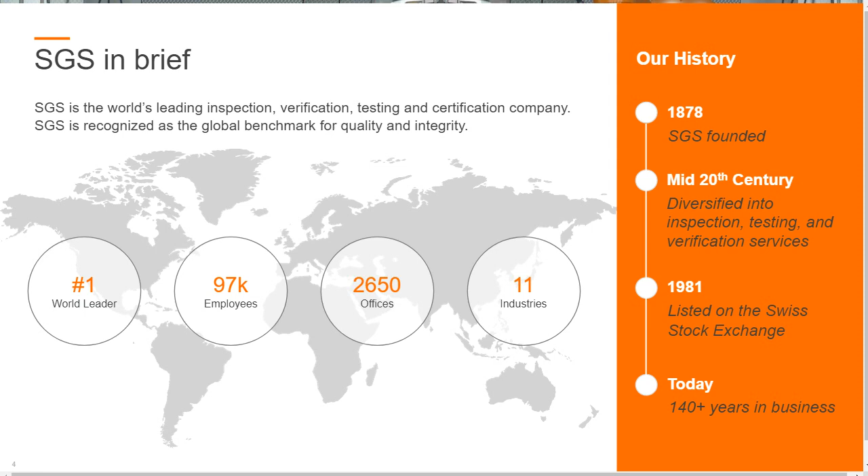Some of the services that we offer with our consultative services division, what we like to call knowledge solutions, range from everything from certification to training, customized audits, our supply chain risk management system, Transparency One, as well as just overall technical consulting.

And if you aren't already convinced as to why you should choose SGS, here on your screen are some of the differentiators that make us stand out when looking at us in comparison to our competition. We definitely have the industry experience, been around, as I mentioned, for over 100 years. We have the largest global footprint in terms of resources, and quality of service is something that we highly value. So we ensure that every interaction is met with the highest quality, and we like to work with you as a partner to ensure that you get to where you need to be.

And with that, I'll hand it off to Dusan to take us through our agenda. Good morning, good afternoon, everybody. Let's go quickly through the agenda of today's call.

We're going to talk about industry technological trends, some common automotive expectations, review of automotive customer requirements from some major OEMs and Tier 1s. We're going to cover automotive sustainability guiding principles. We're going to talk about automotive management systems, automotive integrated management systems, the way we see it. We call it a holistic automotive approach.

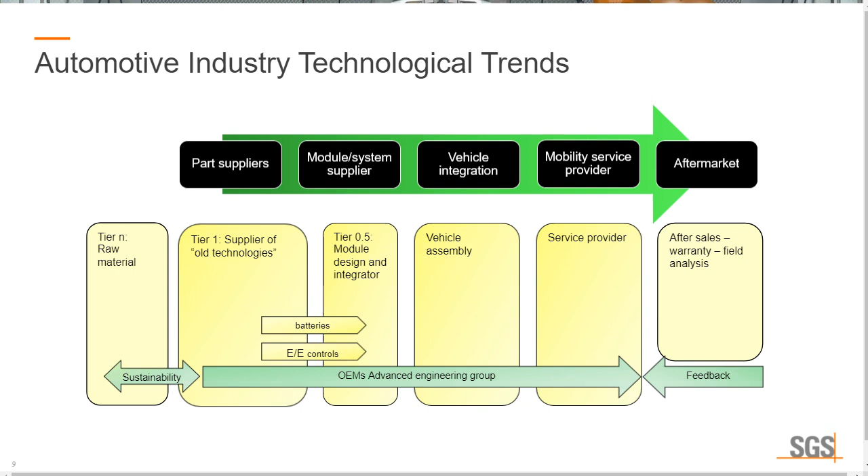With the OEM sourcing managers armed with the knowledge of evolving technologies, the challenge for the OEM and suppliers is how to stay ahead of the curve. As the supply chain can influence a business's success, the risks associated with choosing the right supplier become a key business decision. I'm sure we're all aware of that.

We know that over the past 4 or 5 years, safety has become the big thing with ISO 26262, functional safety for automotive vehicles. And we have some other standards here as well. A lot of technology is actually developing in this area.

So naturally, because it's electronic, it's a computer, it's an open network, security is a thing that's coming together, and you can't really detach safety and security. They're all tied together. With the exception of Tesla, most automotive companies have a fragmented supply chain model.

So making sure to check all sustainability boxes that I list here is very important to be able to be perceived as a trusted partner.

So competencies, compliance to industry standards, change management, staying ahead of the curve, as we call it, resources, the competence, of course, customer service, quality issues.

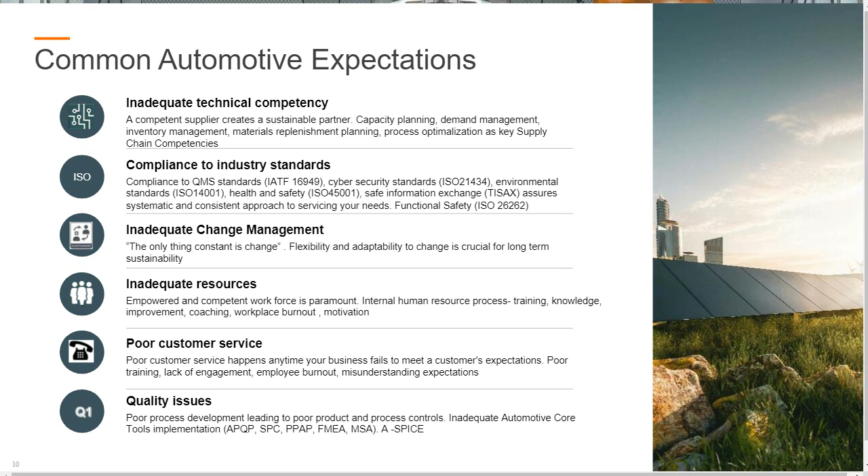Furthermore, environmental pollution. The OEMs have become very strict in choosing the right supplier that basically makes sure that they don't add to global warming. Shortages of raw material, natural resources, workforce health and safety incidents, absolutely.

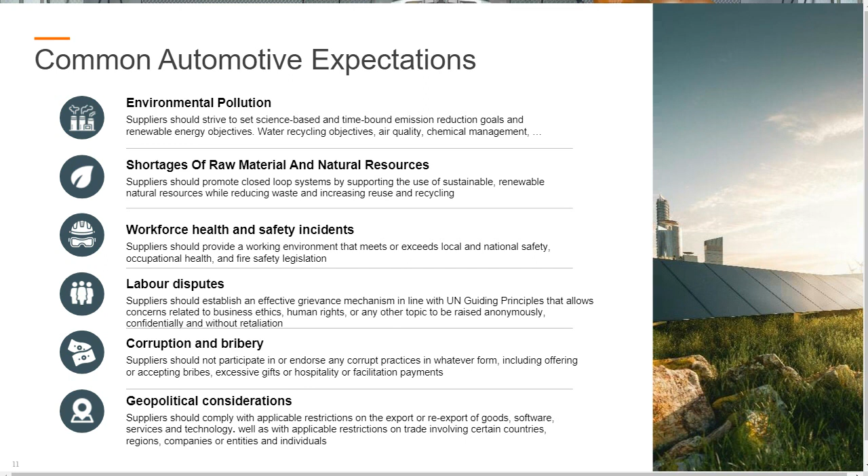Workers' satisfaction is very important. Their awareness and empowerment, as we call it. Labor disputes, mechanisms about that, corruptions and bribery have to be addressed definitely, and of course geopolitical considerations. Those are all basically sustainability boxes that each supplier has to take into consideration when approaching an OEM for a new bid.

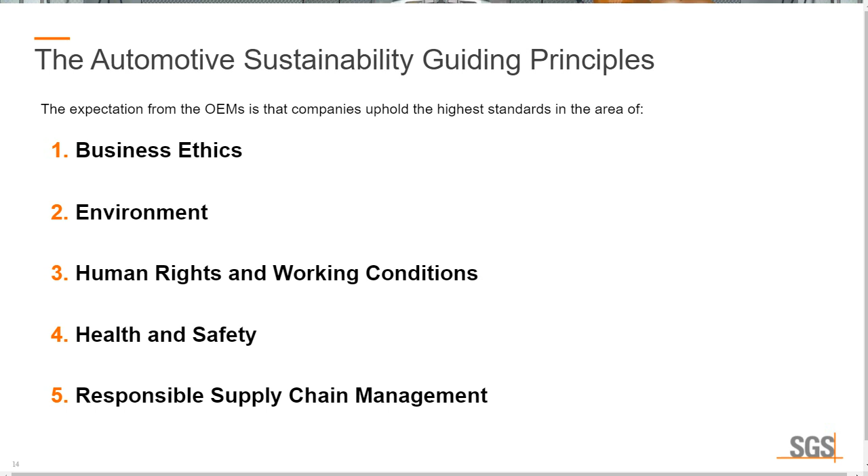So when we talk about automotive sustainability guiding principles, needless to say that a certain quality management system and certain management systems as a whole address several aspects of the sustainability aspect. So, for example, quality: ISO 9001 or IATF 16949 are quality management systems, basically handling the product quality or service quality, for that matter, when dealing with ISO 9001.

Software process, ASPICE, stands for Automotive Software Process Improvement and Capability Determination. It is used in the automotive market for, as we call it, embedded software that we see nowadays in every vehicle. Safety requirements: ISO 26262, road vehicles functional safety, is an international standard for functional safety of electric and electronic systems in automobiles.

21448, safety of intended functionality, is a next step to 26262. Of course, cybersecurity nowadays is very important. There's a standard covering the requirements for suppliers: ISO SAE 21434, road vehicle cybersecurity engineering.

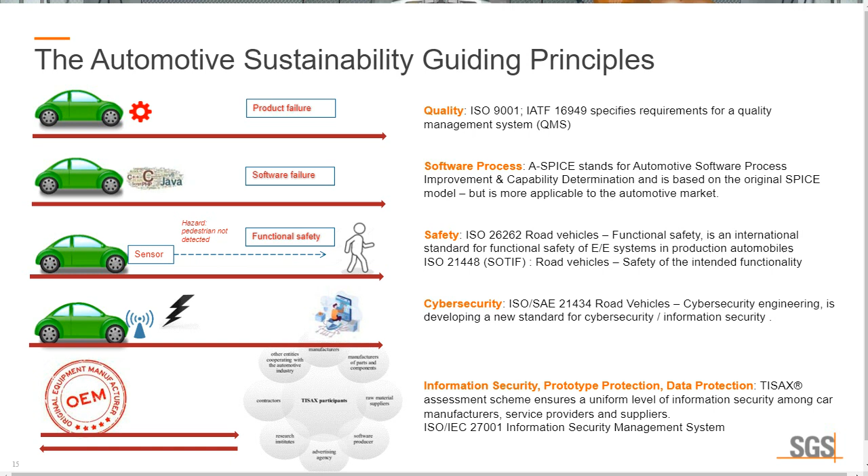TISAX, basically trusted information exchange, doesn't cover only OEMs, but basically everything that surrounds OEMs—any prototype data, any data that is exchanged between OEM and surrounding companies dealing with the OEM. Finally, ISO 27001 is an information security management system. It's very similar to TISAX, but it's not the same.

So in the previous slides, we covered ESG, automotive sustainability, environmental, social, and governance principles. We understood that OEMs' sustainability focus is business ethics, environment, human rights and working conditions, health and safety, and responsible supply chain. So I don't think it should be a surprise to everybody to see here listed several standards that automotive suppliers should

engage with, or should be looking to be compliant with, to make sure that they make a strong case when approaching the OEM for new business. So just several here: 14001 environmental, 45001 occupational health and safety, 50001 energy management systems, then greenhouse gases, social responsibility, asset management, anti-bribery management, just to list a few.

So when we list in a table, like I did here, all these standards that we talked about, we can distinguish them by two aspects. So-called ISO basically defines Type A management system standards that contain requirements against which an organization can claim conformance, whereas Type B management system standards do not.

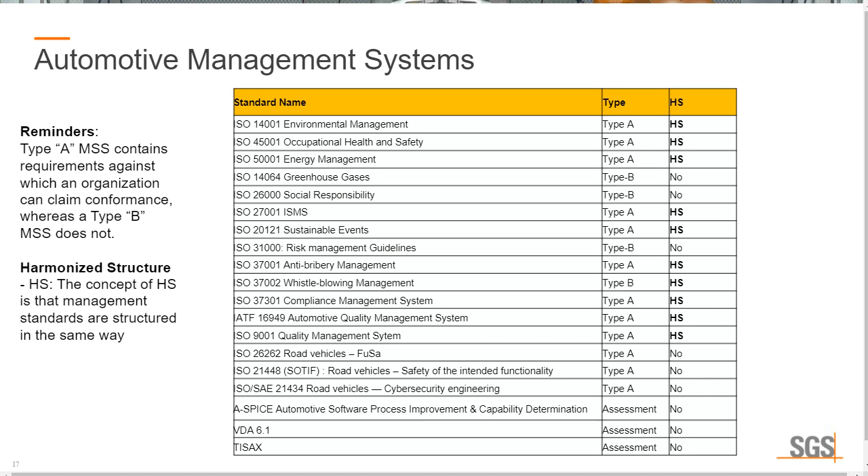Now that we understand that several ISO standards follow the same high-level structure, and knowing that OEMs very often require their suppliers to be compliant and certified to these standards, it is beneficial for suppliers to use an integrated management system approach instead of, as we call it here, piecemeal, building one by one.

So by building an integrated management system approach, they can benefit across the organization, basically save time, increase efficiency. The processes that they build can, at the same time, fulfill several requirements across each of these standards.

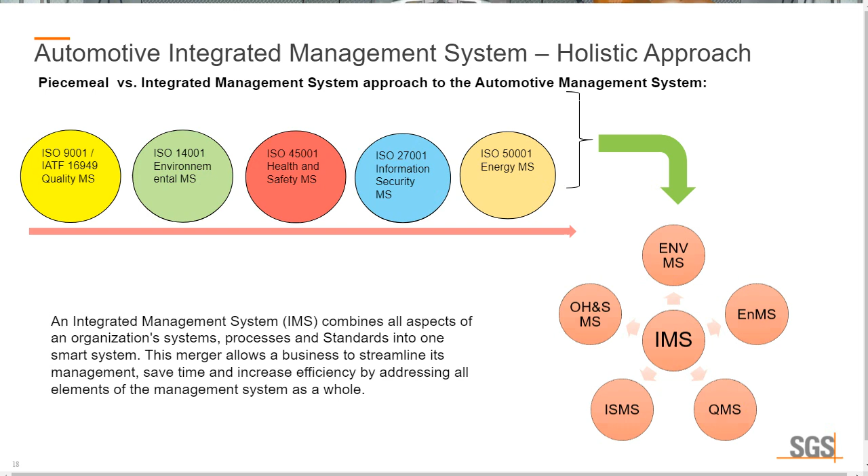So a different way of showing the integrated management system approach, or holistic automotive management system approach, I show on this slide—different scopes, different focuses of different standards that very often have common requirements: quality with IATF, safety, ESG, environmental health and safety, and security, as shown here with their applicable standards listed on this slide.

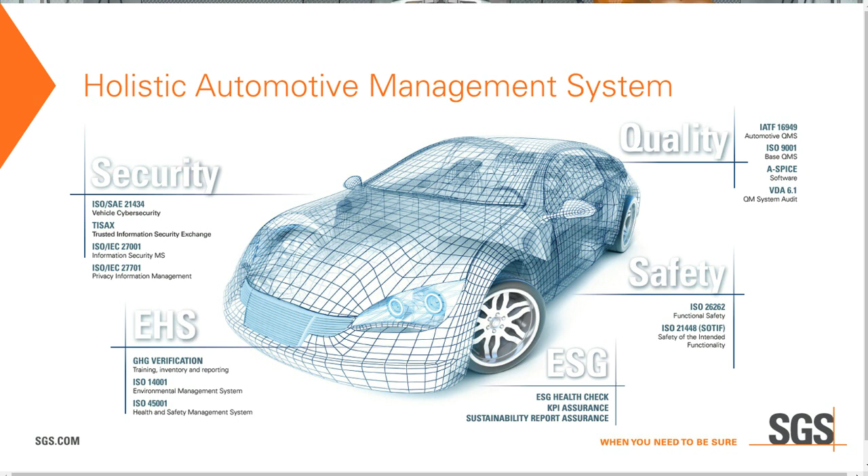There are multiple benefits of following this holistic approach: establishing consistency, removing redundancies, reducing costs, optimization of processes and resources, consolidation of audits, integrated management system audits, better decision making as you understand things across multiple requirements, reducing bureaucracy, and so on.

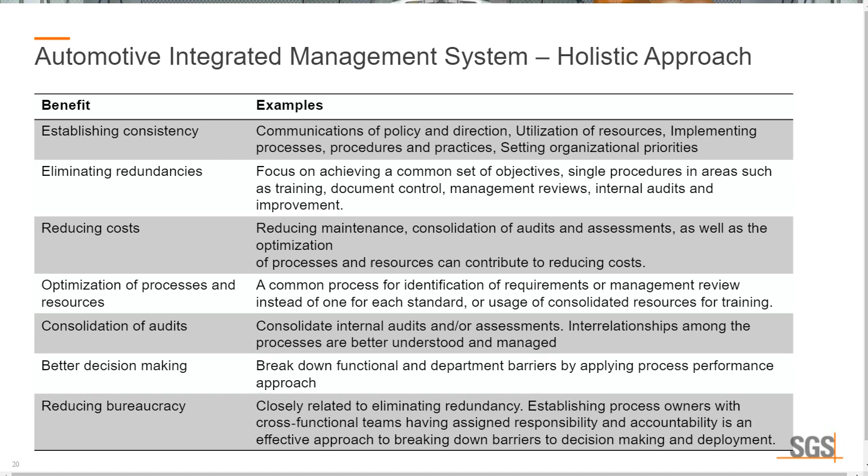When talking about components of any management system, not only automotive, there are several essential components that need to be clear for the system to function efficiently and effectively: objectives, processes, organizational structure and resources, and performance feedback. This is the PDCA cycle we very often hear about for a management system.

So in general, why does the system exist? It's usually to satisfy the needs and expectations of interested parties. You will hear that very often in ISO 9001 based systems.

The basic principle of a management system is understanding the context in which the organization operates, by examining its external and internal issues that determine the system's success and sustainability. The management system exists to fulfill requirements and to address and control any external and internal issues that can limit the effectiveness or efficiency of that system.

So the organization has to plan the processes around the management system in order to control their external and internal issues. They then implement the plan, monitor the efficiency and effectiveness based on data, and make appropriate adjustments, as mentioned with the PDCA cycle earlier.

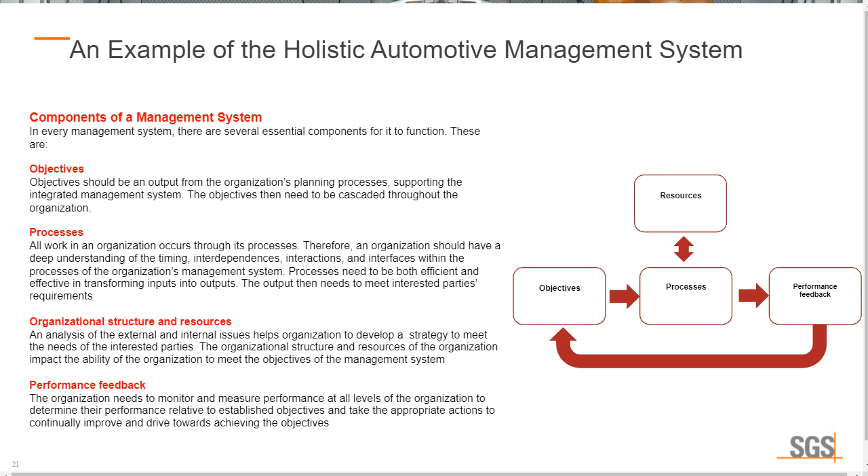We mentioned earlier that we have a high-level structure that's common among several management systems. I show here environmental, energy, quality, information security, and occupational health and safety systems that all put together create an integrated management system. So the integrated management system and all these separate standards have common nomenclature.

Clause 4.1: understanding the organization and its context, understanding the needs and expectations of interested parties. Of course, interested parties can be the same or different. Clause 4.3: the scope of the management system. Sorry, I said quality there, but I'm thinking more of the integrated management system.

Then clause 4.4, integrated management system and its processes. Organizations have to develop processes that satisfy requirements within each of these clauses. Clause 6.1 is very important when planning for an integrated management system: the organization shall consider the issues referred to in 4.1 and requirements referred to in 4.2, to make sure that risks and opportunities are addressed properly, and that we have a functioning management system in place.

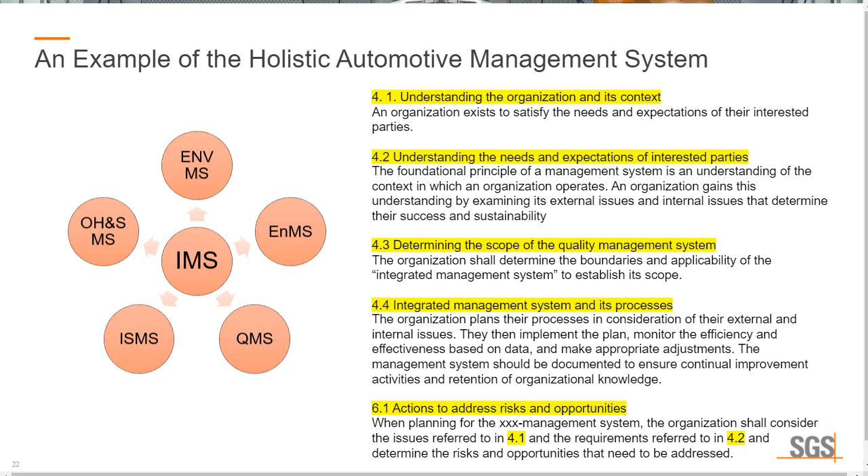Going further with this example, I wanted to show you a simple company that wanted to integrate several management systems as required by their customers. They're integrating ISO 9001 with ISO 14001 environmental, 27001 information security, 45001 health and safety, and 50001 energy management systems. The top column basically has the same verbiage, only the scope of the system is different.

Any internal and external issues listed here in this table can be the same across multiple systems, but don't have to be. For example, internal issues for quality management systems are human aspects, infrastructure, operational factors. External issues are suppliers, social factors, competitiveness, technology, and so on.

Let's skip to 27001: internal issue, information system, information flow; external issue, contingencies and technical advances. You know how much a company wants to implement the new technologies that are available. Going to the end, energy management system: external issues, again, technology, legal, environmental; internal issues, operational factors, employee knowledge, vision and mission. Where does the company see themselves as a factor in our economy?

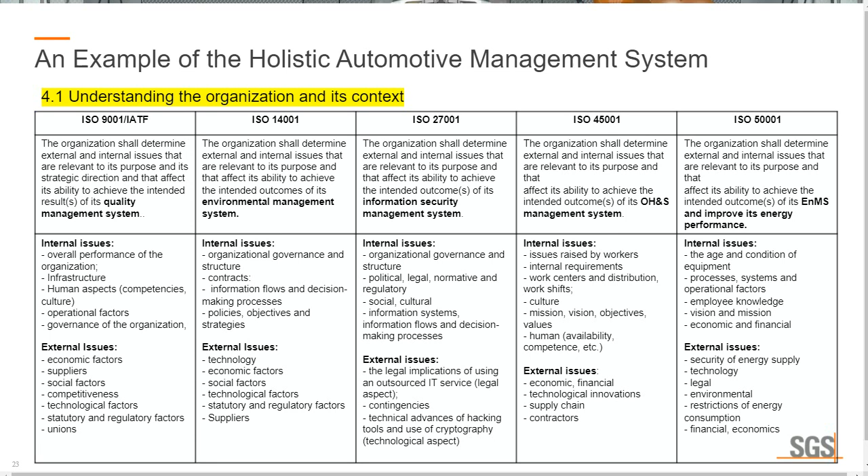Going further, clause 4.2, understanding the needs and expectations of interested parties. So we now know the interested parties. We want to know what their needs are and what their expectations are for each of these management systems.

So interested parties relevant to, for example, quality management systems are, of course, customers, end users, owners, and so on. Their needs and expectations are customer requirements regarding conformity, availability or delivery, statutory and regulatory requirements for the product or service, contracts for external providers, and return on investment.

Skipping to 45001, interested parties are employees, owners, customers, regulators, visitors, contractors, suppliers. Needs and expectations: making sure legal requirements are met, making sure adequate training is in place for competence and for any health and safety issues, and of course requiring our suppliers to have similar objectives in their management systems.

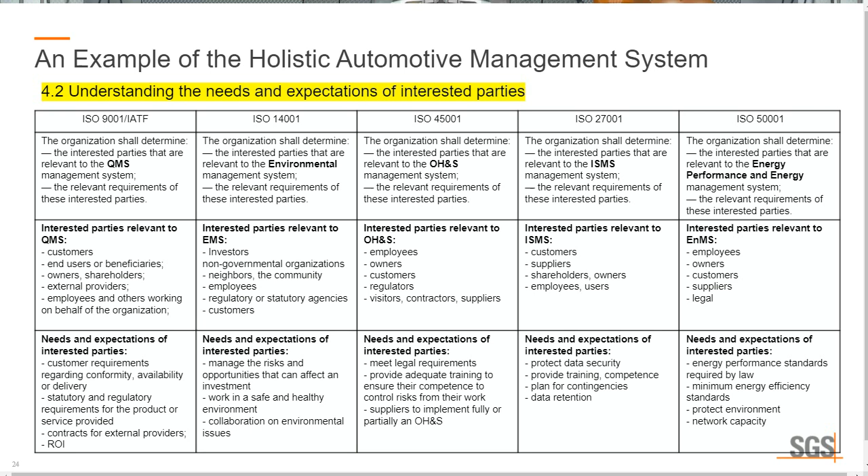As stated earlier, all work in an organization occurs through its processes. Any organization should have a deep understanding of the timing, interdependencies, interactions, and interfaces within the processes of the organization's management systems. We know that processes need to be both efficient and effective in transforming inputs into outputs.

The best way to present the process is through what we call turtle diagrams, where basically you have inputs, then the process itself, and then output, with several branches for people, jobs, responsibilities, materials, information, infrastructure, competencies, and other resources, and the measurement of the process performance.

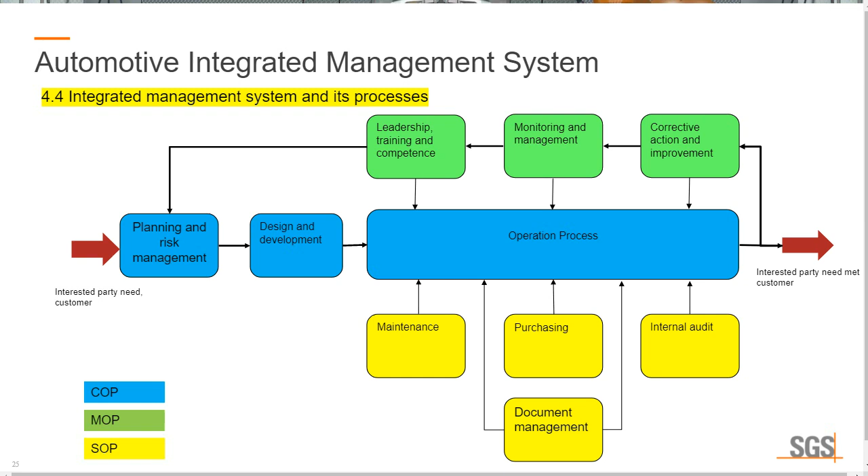Let's study further our example shown in previous slides. Having the integrated management system with the processes we listed, the organization we look at developed the following processes, shown here on the left side in green: planning and risk management, operations, leadership, monitoring and measurement, internal audit, corrective action, and improvement. It basically follows the PDCA cycle we talked about many times.

Each of these processes would satisfy or address requirements that each of these management system processes have under those clauses. Planning and risk management is one of the requirements of each of these standards. So quality management system has its scope, has actions put in place to address risks and opportunities, developing quality objectives; EMS has environmental aspects; ISMS has information security; occupational health and safety has hazard identification, assessment, and so on.

For operation, quality management system addresses product quality. For EMS it's emergency preparedness and response. For ISMS it's information security risk assessment and treatment. For occupational health and safety, eliminating hazards. For energy management system, energy performance improvement, and so on.

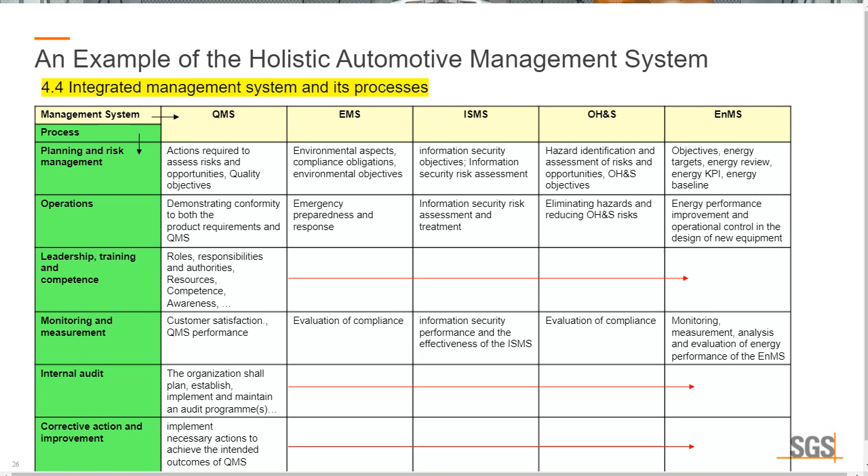To further examine this example, I want to remind you what I said under clause 6.1 in previous slides. When planning for the integrated management system, the organization shall consider the issues referred to in clause 4.1 and the requirements referred to in clause 4.2, and determine the risks and opportunities that need to be addressed.

On this slide, I show on the left interested parties in light green, and horizontally their needs and expectations: owners, shareholders, customers, suppliers, employees, and their needs and expectations for different aspects such as financial benefits, ethical behavior, customer requirements, risk control, and supplier partnership. This example can go further, but this is just to show you how to approach this element.

What we can do is cross-reference each interested party with their specific needs and expectations. If we cross-reference owners and financial benefits, risks are no returns on investment and reputation loss, while an opportunity would be diversifying.

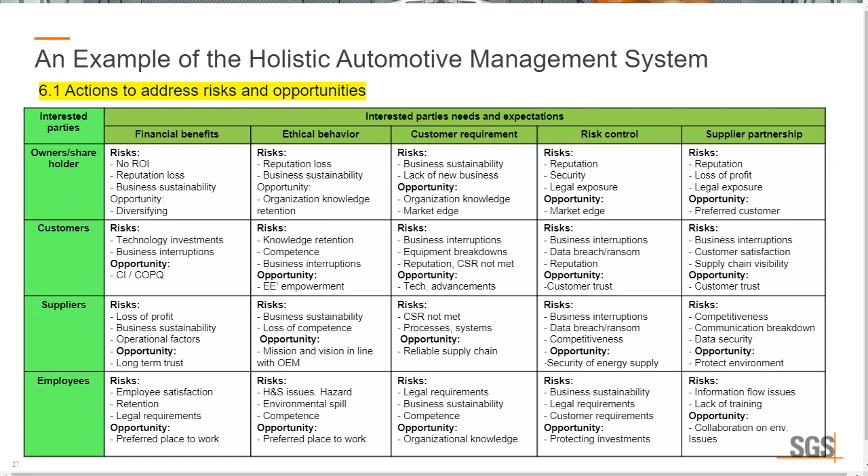In the previous example, we showed a multiple management system and how we integrate them. I wanted to add some additional customer requirements we saw in those previous slides, where, for example, ISO 26262 as a functional safety requirement is one of the requirements in the OEM's list. What I show here is the APQP process.

APQP is a core tool used in the automotive industry. We can say the quality standard is a prerequisite to ISO 26262. It's expected that all processes under ISO 26262 must be implemented in the quality management system. So a functional safety product needs to be developed under the umbrella of the quality management system—that's one of the clauses in IATF.

All these requirements through different parts of 26262 are very similar to what APQP has already described as deliverables for different milestones. Initially, plan and define with the concept phase, HARA definition, functional safety concept, then product design and development, and process design and development.

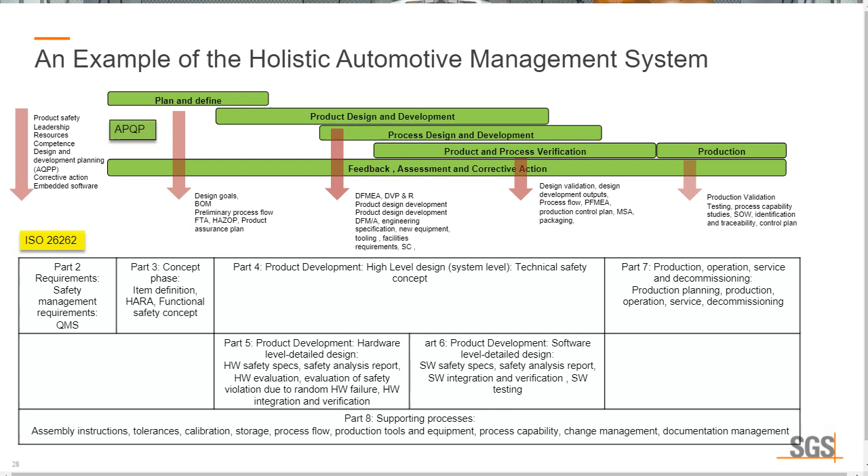As an addition to the previous slide, since we already have quality management system processes, I pulled the processes from the previous example. The requirements are already visible in the quality management system. So cross-referencing requirements under QMS versus 26262 or a functional safety standard, we can build processes that satisfy both the quality management system and 26262.

In this example, under planning and risk management in the quality management system process, we have to demonstrate conformity to product requirements. Similarly in 26262, there's an impact analysis, a planning stage, and an implementation stage where we build assembly instructions, tolerances, and so on.

Leadership, training, and competencies—the quality management system has clear requirements for that. So does 26262, with a process to ensure identified functional safety anomalies are explicitly communicated to the applicable safety manager and other responsible persons. It's implied that the safety manager has the competencies to address the issue.

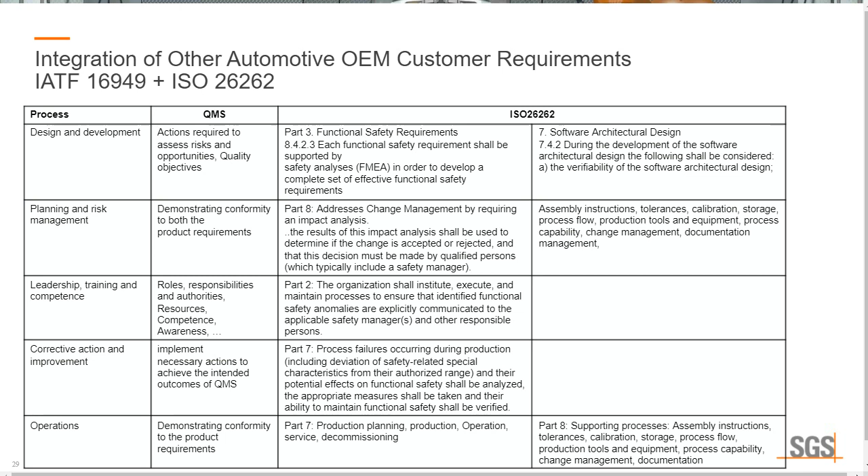In this webinar, I want to cover several more standards that appear as requirements in the OEM slides we reviewed earlier. ISO 21434 considers cybersecurity as a specific automotive engineering discipline and sets criteria for vehicle cybersecurity engineering. The standard applies to road vehicles, systems, components, software, and so on. It's intended to address cybersecurity for road vehicles in a way similar to how ISO 26262 addresses functional safety.

ASPICE, or Software Process Improvement and Capability Determination, is a standard used as a framework for improving and evaluating process in the automotive domain. IATF 16949 is mainly concerned with quality management system processes from the organizational level, while Automotive SPICE focuses on assessing the capability and maturity of the organization's core processes from the project perspective—software project level.

In both frameworks, all processes are organized according to the V-model, such that each process on the left side corresponds exactly with one process on the right side. We presented the V-model in an earlier webinar, and 26262 and 21434 both follow it as a methodology.

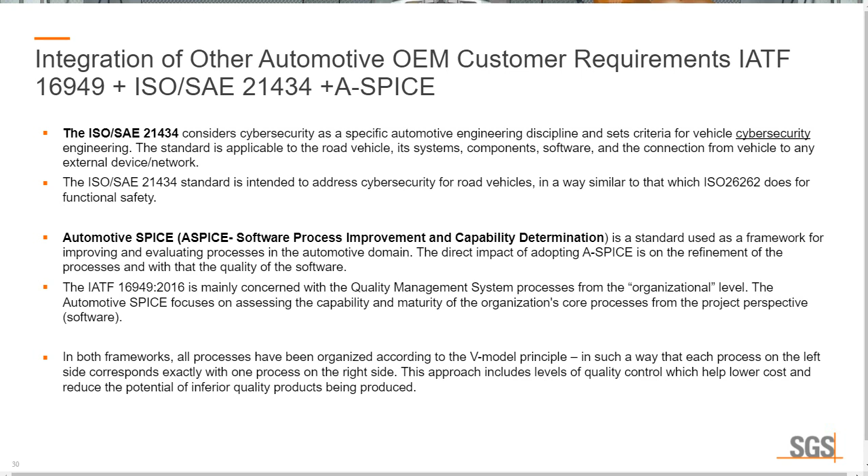Similarly to the previous slide, I put here side by side the quality management system, functional safety, cybersecurity, and ASPICE requirements, next to the processes we showed in the earlier example. Again, the way you design your process can fulfill the requirements of multiple standards—not only the quality management system, IATF or ISO 9001, but also all these additional requirements that OEMs are currently asking us to do.

For 26262, design and development: in QMS we have requirements for products and services; in 26262, concept phase and system safety requirements; in 21434, requirements for cybersecurity management; in ASPICE, conformity requirements. Very similar intention across all these standards.

Planning and risk management, which we covered, and risk analysis—26262 talks about risks again, as do 21434 and ASPICE. Moving to corrective action and improvement: problem solving is a key element in the quality management system, and 26262, 21434, and ASPICE have the same requirements. Again, building a quality management system process that addresses risks, opportunities, and the needs and expectations of all interested parties is the beneficial way to go.

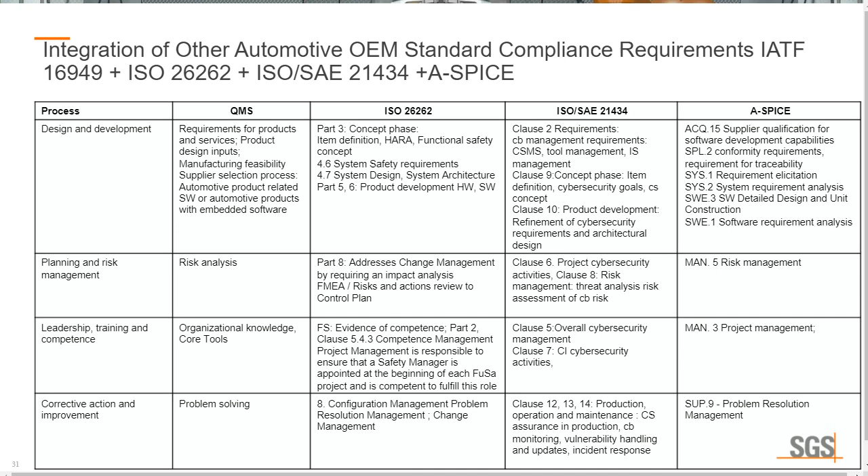OEMs are currently requiring their suppliers to be very vigilant when dealing with cybersecurity. They want to make sure that any information exchange - not only product as assembled on the vehicle when communicating to the network, which the standard previously talked about, 21434, covers - but also when talking to their suppliers during prototype builds, any CAD exchange, any data exchange with the suppliers, has to be safe from any cyber attacks.

This is an intro to TISAX, as we call it, Trusted Information Security Assessment Exchange, and that is becoming a norm in North America. Not only is it actually a German standard, but it is becoming a norm in North America. So if you want to make sure you address this as a requirement in front of customers, the suggestion is to take the assessment.

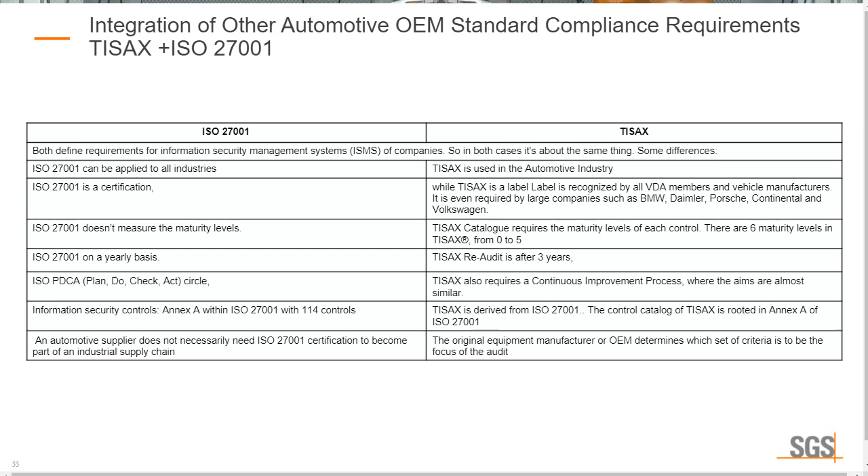With this slide, I want to thank you, and we're going to go back to questions and answers after. Thank you, Dusan, and thank you, everyone.

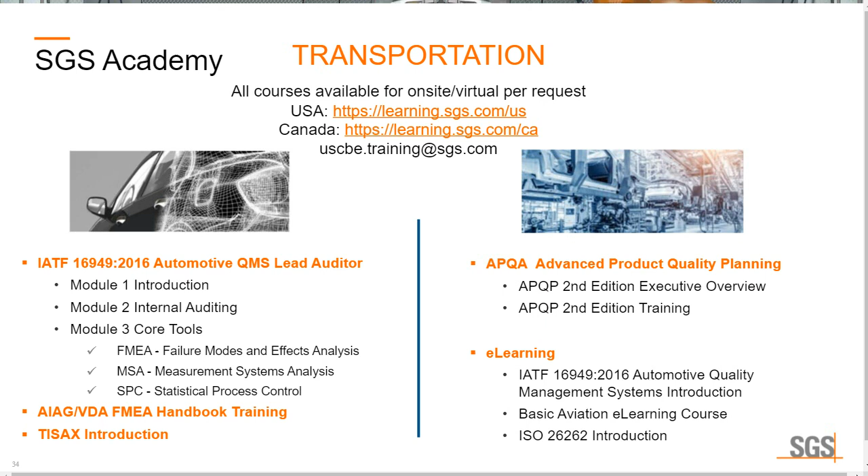Thanks, Hisham. I see a few questions posted here in the chat screen. I want to answer them before we close the webinar. Question number one: is SGS an approved TISAX assessor? Yes, SGS is an approved TISAX assessor in North America, Europe, and worldwide for that matter. So yes, please, if you need any service, arrange with us, contact us.

Question number two: can SGS provide consultancy or gap analysis for ISO 26262 and 21434? That's a little bit of a complex question. SGS is a certification body, so we do audits. We shouldn't be consulting and then auditing the same client. For this, we have our partners who are basically more than capable to provide consultancy and gap analysis - engineering companies that work with OEMs, and they can help you build a system in accordance with requirements. At the end, we would come in and audit those systems. So full service, I guess we can call it that, is an option for you.